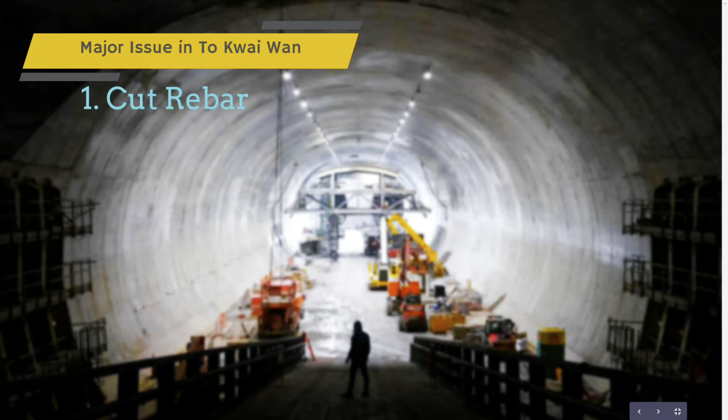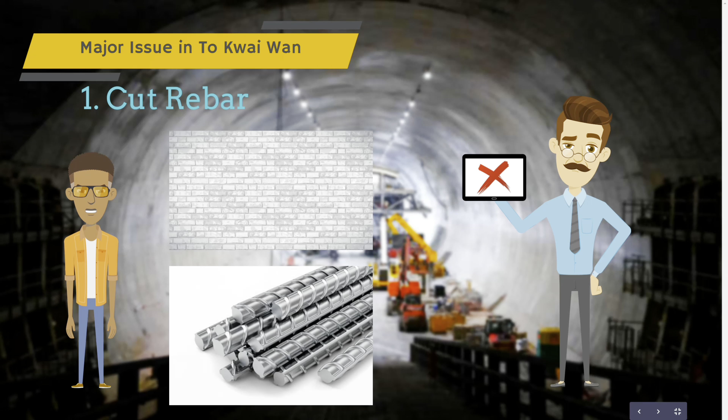First, let's talk about the issue happened in To Kwa Wan. The first issue is that there are cut rebar found in the platform. The partition wall between the escalator and the stairs is found not being implemented in accordance with the plan. One of the two layers of steel bars in the wall was cut away, but the supervisor of the MTR Corporation did not report the issue. The MTR confirmed that the MTR supervisor did not report the contractor's fault and has begun disciplinary procedures.

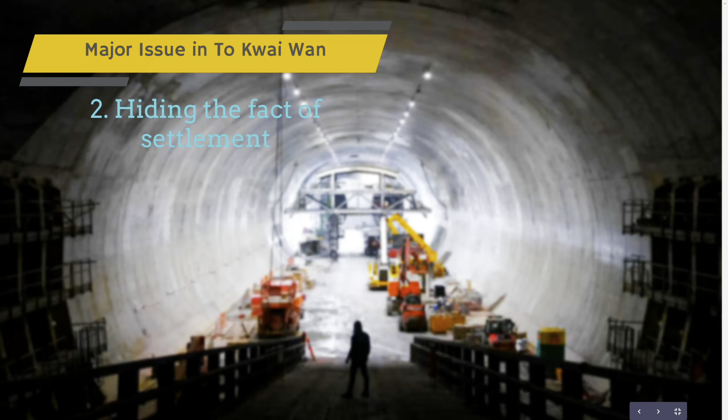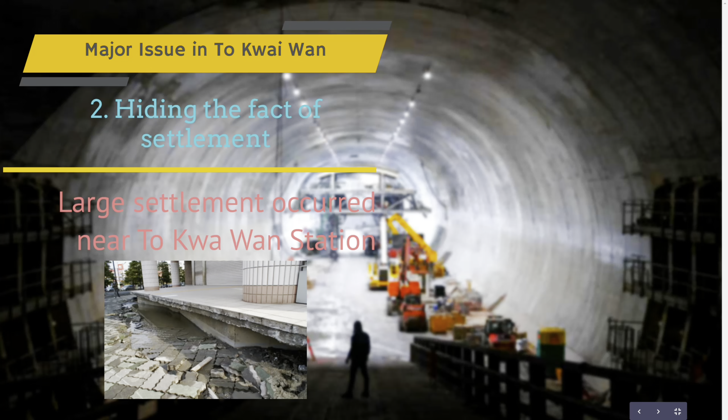The second issue in To Kwa Wan Station is that there is a hidden fact of settlement. There is a large-scale settlement occurring near To Kwa Wan Station, causing 23 surrounding buildings and underground pipes to settle beyond the allowable upper limit, with 7 locations exceeding the allowable limits. In addition, the settlement of 3 pipes exceeds the standard.

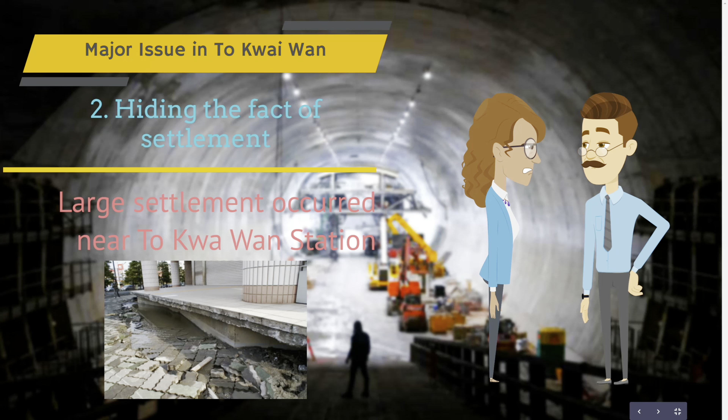A gas explosion may occur. However, the Highways Department, MTR Corporation, and Leighton Asia Limited did not inform the public about the settlement and still continued the construction. There were no consequences for them in this issue.

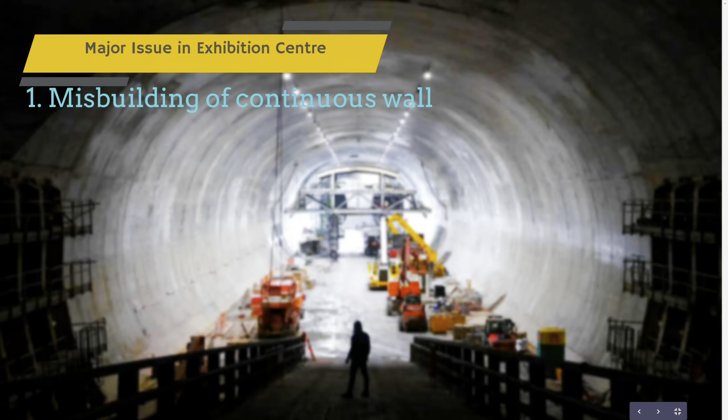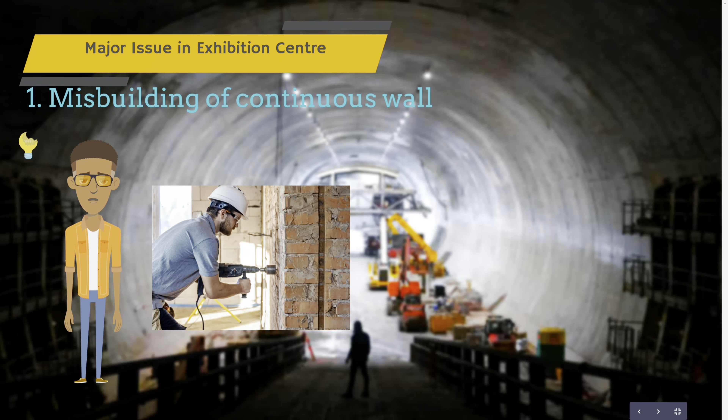Then, let's talk about the issues that happened in Exhibition Center Station. Firstly, there is a misbuilding of the continuous wall. Engineers drew the wrong plan due to inefficient communication, and it caused a front and back error of the construction wall. The front and back were turned around during construction.

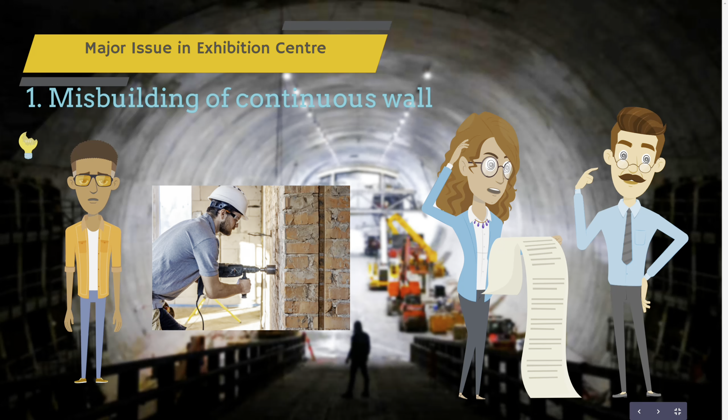The supervisor of the MTR Corporation claimed that he already knew about the problem back in 2016, and a failed report has been issued to the contractor.

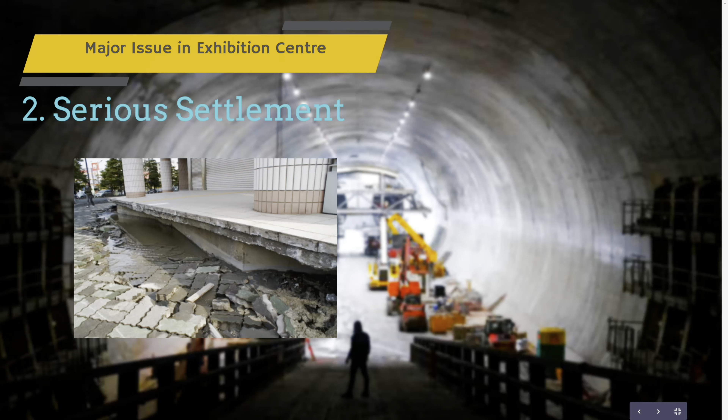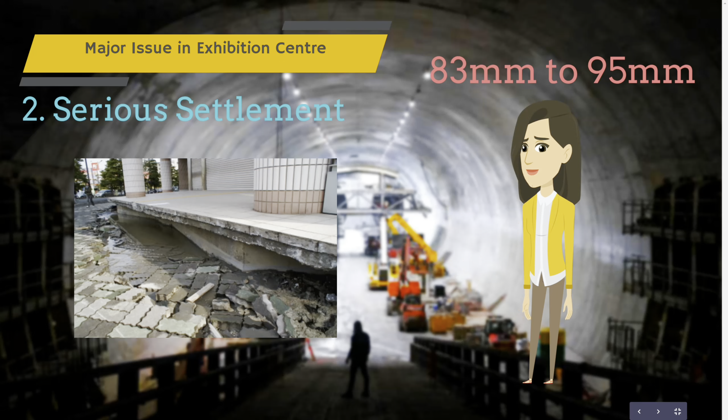Secondly, there is a settlement problem also at this site. There is an 83mm settlement in this site, which exceeds the standard by 2.3 times. The problem wasn't revealed until newspapers reported it. The project was forced to shut down until the government relaxed the settlement standard to 95mm.

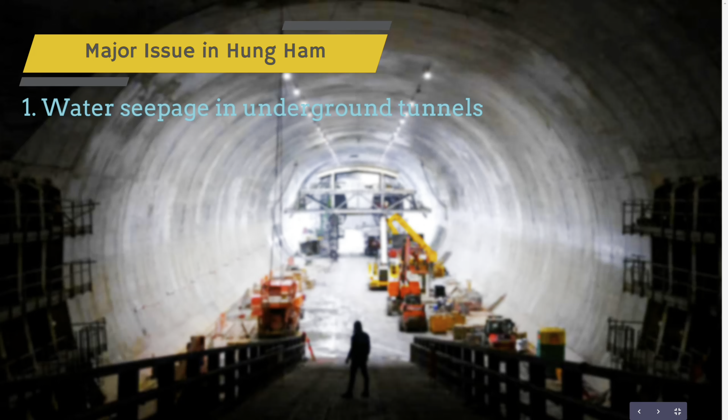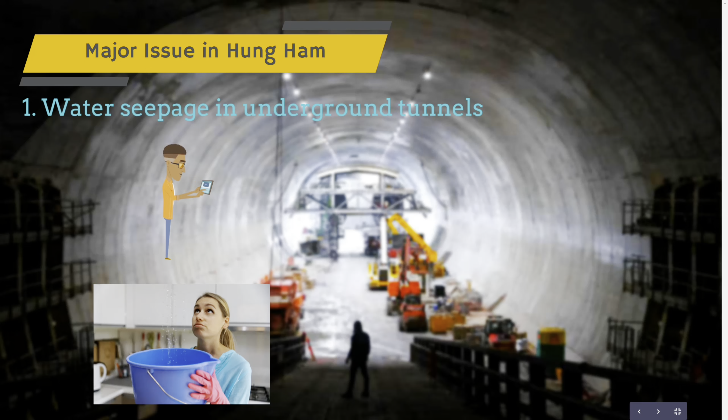Then let's talk about the issue that happened in Hung Ham Station, the most serious location in these incidents. Firstly, there is water seepage in underground tunnels. Newspapers revealed that a tunnel near Hung Ham Station has a serious water seepage problem. After investigation, it was found that the steel bars inside the tunnel were not fully connected and not filled with concrete. China Technology Corporation was charged a penalty in this incident.

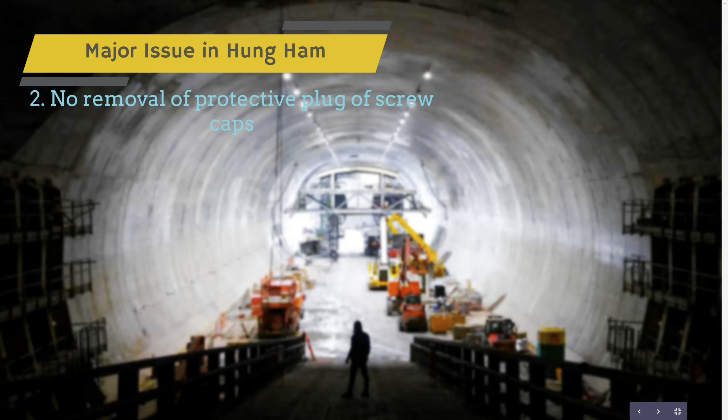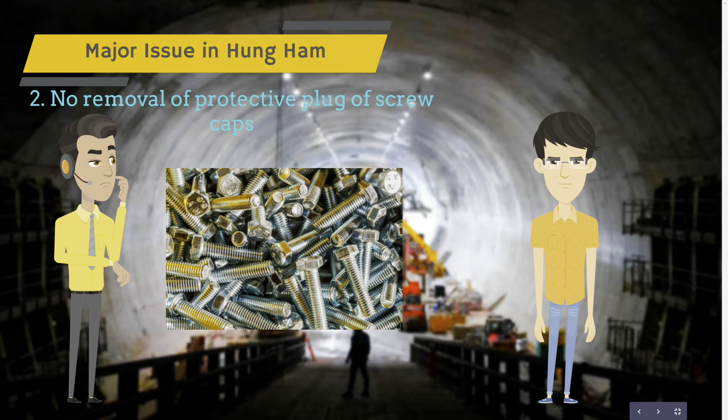Secondly, newspapers revealed that some of the protective plugs of screw caps were not removed in the continuous wall in a tunnel. Some professionals commented on this issue, saying that if the protective plugs are not removed, it means there is no twisting in of the rebar. The structure of the continuous wall is not completed and there is danger at any time—it may collapse.

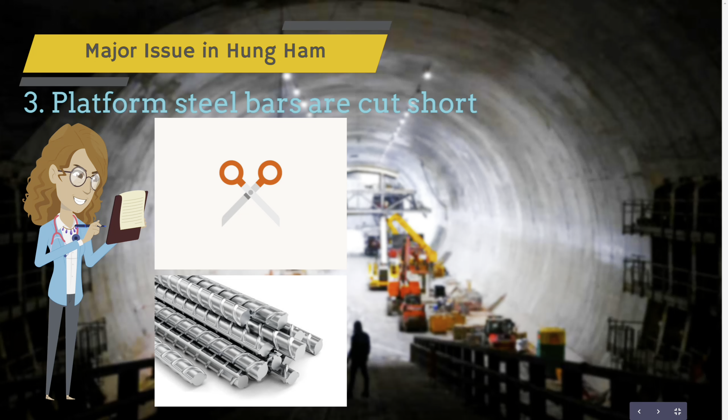Lastly, newspapers also revealed that in 2 main walls on the platform, the steel bars were cut short. Leighton Construction, the contractor in charge, not only failed to replace the defective parts, but pretended to make a successful connection. It was also found that the contractor changed the design before construction and removed part of the top layer steel bars in the design of the 77 continuous wall.

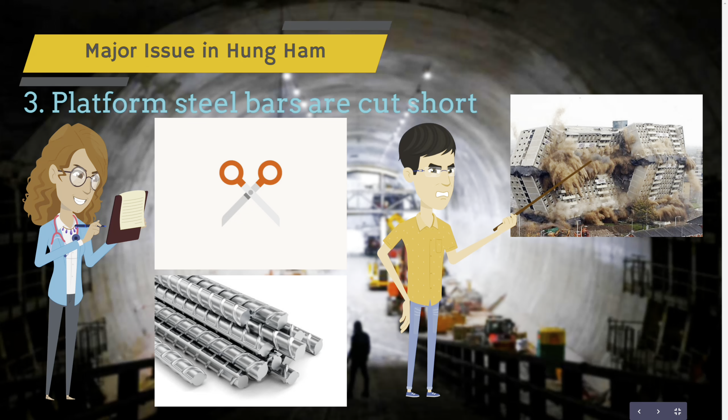However, the design was never formally submitted to the MTR or the Buildings Department. It was only in January 2015 that the MTR and the government discovered the problem, but it was not announced to the public. Short steel bars could cause serious structural problems and may cause the building to collapse. The MTR only reported to the media in closed-door meetings.

These incidents are very serious, and they could endanger public safety. Let's look into how different stakeholders responded to these incidents.

Firstly, in these incidents, the MTR Corporation mostly denied the accusations at first. However, as more and more evidence was found by newspapers, they finally admitted there was an oversight during supervision, and some supervisors were punished in these incidents.

For China Technology Corporation, the CEO claims that they completed the construction work according to Leighton's planning, and the supervisor of Leighton Asia had already approved their construction. The incidents happened according to Leighton's plan—those incidents are not their fault.

Lastly, the government suspended the main contractor identity of Leighton Asia Limited after these incidents. However, Leighton Asia Limited was then resumed bidding qualification. Some congressmen commented that the punishment is too slight for such serious incidents.

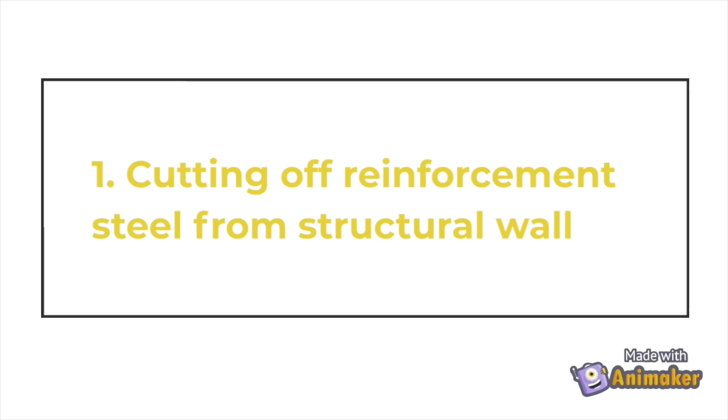Now I'm going to talk about the violation of specific codes of practice, regulations, ordinances, and laws in this scandal case. The first issue is the cutting off of the reinforcement steel from the structural wall in To Kwa Wan Station. It has been discovered that the partition wall in the station was not implemented in accordance with the architectural drawing.

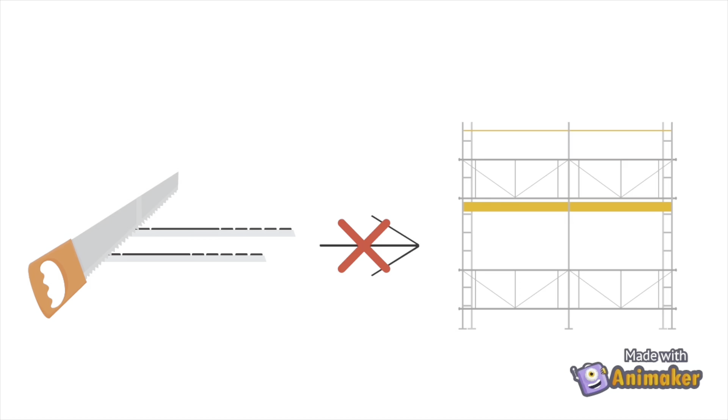A layer of reinforcement steel in the wall was cut away, but the supervisor of the MTR did not report it. After the implementation of a detailed investigation by MTR, it was confirmed that the supervisor had not informed them about the slack of the contractors, and the MTR started the disciplinary process.

According to the Rule of Conduct for the Hong Kong Institute of Surveyors and Engineers, surveyors and engineers should show responsibility to the professions, employers, and the public. In this case, that construction supervisor was found to have failed to follow the above rules.

Firstly, the supervisor violates the rules that require responsibility to his profession, as he failed to truthfully report the construction issue. The Rule of Conduct states that supervisors should uphold the dignity, standing, and reputation of the profession by discharging his professional responsibility with integrity, fairness, and courtesy. He is also required to give opinions in his professional capacity to the best of his ability, objective, reliable, and honest. Because of his behavior, he has violated the rule on profession.

Besides, for the responsibility to the employer, the Rule of Conduct states that the supervisor shall discharge his duties to his employer with integrity and in accordance, such as offering complete loyalty to his employer in all matters, and acting with fairness between his employer and any other party concerned. That supervisor concealed the construction issue such that his employer, the MTR, has suffered loss of money and reputation. His behavior also violates the rule on employer.

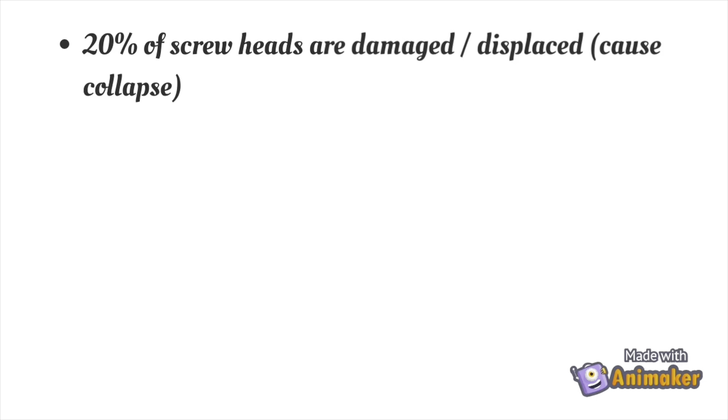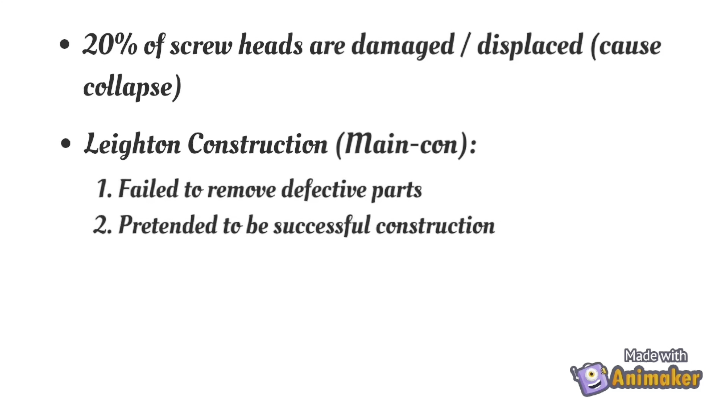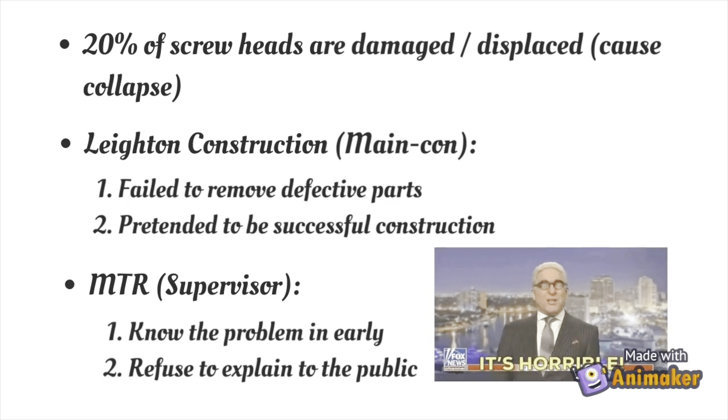The final issue is the falsification of the platform in Hung Ham Station. It was revealed that 20% of the screw heads in the platform are damaged or displaced, which may affect the tensile and load-bearing capacity of the structure and cause collapse. The main contractor, Leighton Construction, not only failed to remove the defective parts but pretended it was a successful construction. The MTR admits that the reinforcement steel issue was found in the early stage. They also refused to provide the exact situation affected and photographic evidence.

In this situation, both Leighton Construction and MTR have violated the Code of Ethics on protecting the safety and public familiarity with the construction issue. Falsification is a serious and unacceptable behavior on a construction project, but these two companies tried to hide the issue, which caused a loss of confidence from the public. This behavior may also violate the law and be required to bear criminal offense.

Move on to the consequences and impacts.

Let's have a flashback about the construction issues in different stations. The media disclosed a succession of construction issues along the Sha Tin to Central Link from the end of May to the end of August 2018, including the extension project of Hung Ham Station, where the steel bars were cut short; the connection point of the continuous wall had seepage; the steel bars were removed from the platform wall of To Kwa Wan Station; the excavation works of the Exhibition Centre Station did not install proper supports; and the settlement standard of buildings and underground facilities exceeded the allowable upper limit, etc.

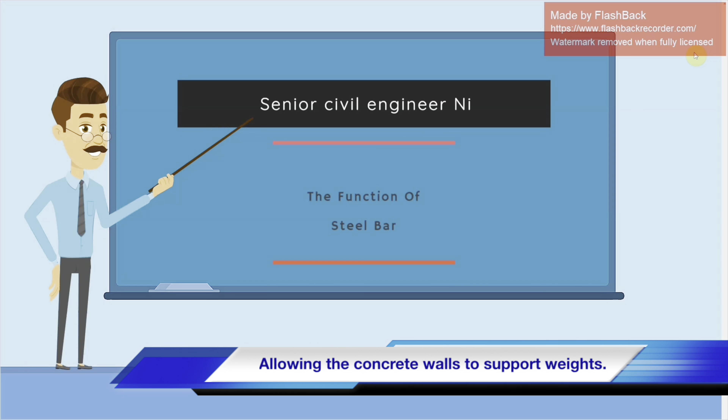Senior civil engineer Ni explained that the main function of the steel bar is to hold the concrete wall. It then links the weight to the wall, allowing the concrete wall to support the specific weight. As a result, if the steel bar is not correctly connected to the concrete wall, the associated weight will lose its bearing points. The steel bar will break due to its inability to sustain itself, and the entire floor will become inclined. On the platform of Hong Kong Station, for example, a great number of steel bars will be sheared, and it is possible that the entire platform layer will collapse.

Move on to the first consequences and impacts.

Increasing cost and operation time. The MTR needs to notify the government of the construction issues on the Hong Kong Station platform, the To Kwa Wan Station concrete wall, and the Exhibition Centre's temporary support works in a timely manner. The engineering supervision system contains faults, and this increased the construction costs and time necessary in an indirect way.

The price of the Sha-Tin to Central Link was 70.8 billion Hong Kong dollars originally, and it is already the most expensive railway project in history. However, during the construction of the link, many hidden problems were found, and the MTR company did not respond to any of it until journalists reported it to the public.

As the project has been prolonged, it requires multiple additional rounds of funding. MTR announced that it had reported to the government on December 5, 2017, that the total cost of the Sha-Tin to Central Link project will increase from 70.8 billion Hong Kong dollars to 87.3 billion dollars, including reserve funds and possible upward project management fees that need to be paid.

In addition, the cost of other projects on the Sha-Tin to Central Link was 8.7 billion dollars, and the expansion project of Admiralty Station was overexpanded by 848 million dollars, which increased the total construction cost of the Sha-Tin to Central Link to 97.1 billion Hong Kong dollars — what can be called a 100 billion railway project.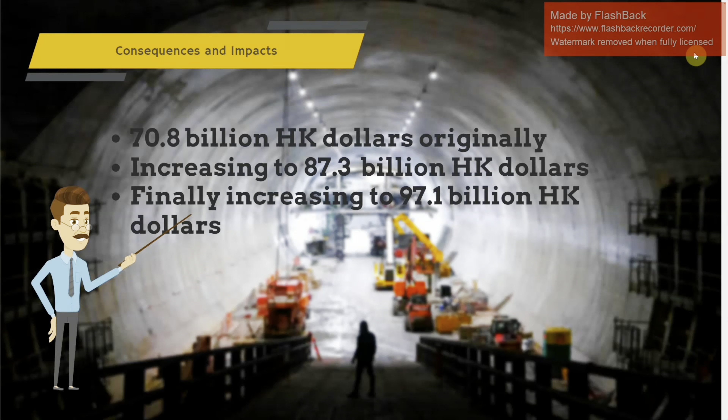Apart from the project's delay and cost increases, safety is also a major concern. As previously mentioned, there's a suspicion of cutting corners on the link, and if constructed this way, safety problems may arise.

Using Hung Hom Station as an example, the reinforcing steel bars were not securely screwed into couplers along the tunnel wall, causing the slab to be stretched and relying solely on the rebar grated into it to hold it back. The bar could come out easily since it is not properly anchored, forcing the platform to collapse if subjected to high pressure frequently. If this situation really happens, it could cause severe deaths and injuries.

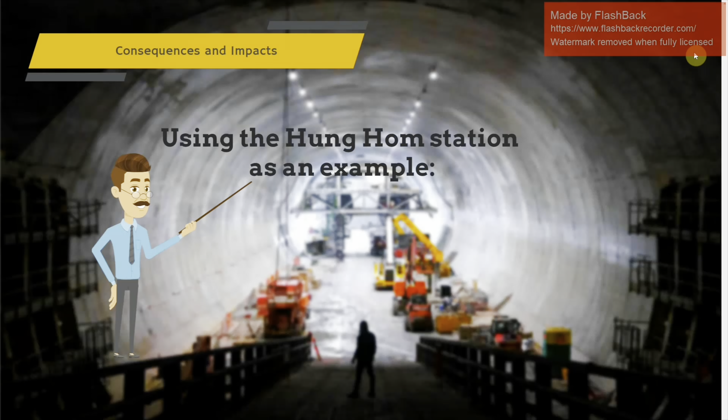Until now, the construction of the Sha-Tin to Central Link has been reported on by many scholars, and it has reduced the popularity and trust from citizens.

In the past, the MTR company, before the merger of the two railways, was able to complete projects and open them to traffic as expected. However, for many years after the construction of the Sha Tin to Central Link began, the MTR has repeatedly requested additional funding on the grounds that the project encountered complicated geological conditions and underground pipeline conditions. Some members question whether MTR had done a good job of survey work.

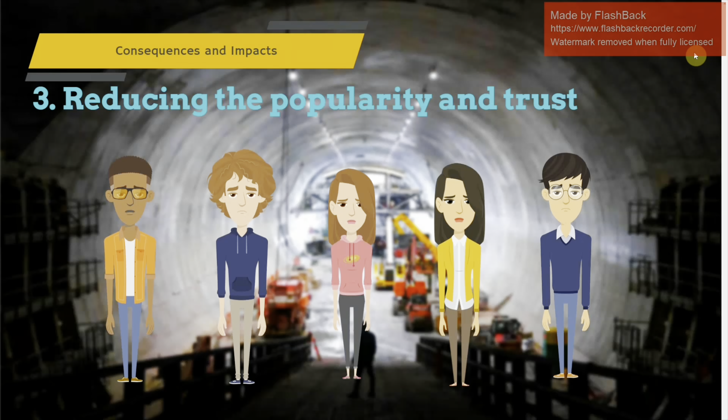Since then, there have been repeated incidents of cutting corners, making the public wonder whether there is a transfer of benefits in the construction.

Now, the conflict has still not been tackled, but there is still something we could learn from this scandal. As part of the construction industry in the future, we should always bear in mind that not only is technical knowledge crucial, but also the ethics of a land surveyor.

Although most of the time our study focuses on the techniques of our profession, that knowledge can only ensure we are able to establish the works properly if we also hold a good ethical mindset to be responsible for our work quality, so we can complete our work to our best.

It is because the quality of work is highly related not only to the reputation of ourselves and the companies, but also to the safety of the public. Ensuring the quality of construction requires us to be responsible to our profession, not cutting corners at any step, but being serious and respectful to the quality of our work, our industry, and society.

In terms of management, the responsibilities of supervisors and companies are high as well. This teaches us that during an accident or an error, the supervisor or person in charge of management should always bear the largest responsibility to monitor the progress and quality of construction, and so should be blamed to the largest extent as well. It reminds us that in the workplace, we should take good care not only of ourselves, but also manage and keep an eye on anything regarding the project for all of our teammates too.